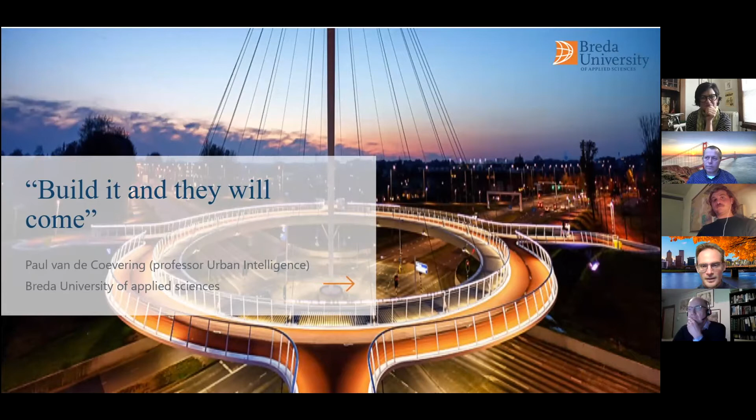Thank you. Okay, so yes, I'm Paul, another Paul, Professor of Urban Intelligence at Breda University. And my expertise is actually on the interaction between land use and transportation, where also cycling and building a multimodal culture is one of my expertise areas. So the interaction between land use, transportation, and attitudes.

So one of the big questions when we try to implement new mobility solutions is if we build new infrastructure, if we build new facilities, will people use it? And the famous term "build it and they will come" is related to that. And it's actually also a question: will they actually come if we build these facilities?

So what we basically try to do in the Netherlands and also in the US, but in a different way, is to create a multimodal city. I've even seen very car dependent and car oriented cities moving towards more multimodal solutions in the last decade. So what we try to do basically is to create compact cities with an emphasis on using public transport and biking and walking, and some balanced car accessibility.

So we all know that the car brought many advantages when it comes to accessibility and freedom, but the downside is also very clear. And as Derek and also Chris already showed during the introduction, in the Netherlands, in the 60s, we also went all the way with facilitating our cities for cars. And then slowly but gradually, we moved backwards, and we re-implemented cycling infrastructure and chose for a more balanced accessibility for the car. And with that, we have been able to dramatically increase also the quality of the public realm.

What I will show today, and I only have 7 minutes, so in approximately 7 minutes, I will try to summarize 7 years of PhD work and a lot of student work that is related to the minor urban retrofitting. That was also where Paul was referring to. We are doing a minor urban retrofitting each year, and we are doing that for host cities in Northern America. And with that, it's a real Kickstarter to get inspiration for new ideas. So for instance, the green loop that is being implemented in Portland. Our students have been developing these ideas also for Northern America and for other cities during the last decades, and this might also be an interesting opportunity for you.

So build it and they will come. Yes, of course, we very often see these examples, and this is one of the busiest cycling facilities in the Netherlands. It's in Utrecht. And what you often see is that we compare the situations between the Netherlands and Northern America, and then look at, okay, so we see much more cycling facilities here, we see many people using it. So if we implement these facilities in Northern America, then will it work? Well, that is of course the question. And one of the challenges that many cities also face in Northern America. But there have been quite successful approaches there, and Portland is also one of the examples.

Why integration with land use is so important is because it's not only the cycling infrastructure that makes people cycle in the Netherlands. First of all, it has always been a big part of compact land use. If you look at the amount of facilities and destinations that people can reach, the Netherlands is one of the top countries in the world. So we have a very compact city, which really facilitates cycling and makes it easier to use the bicycle to a lot of destinations.

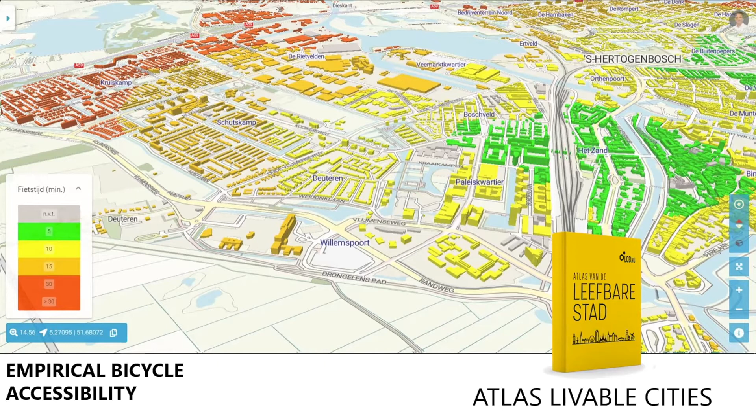And this is the last part of the presentation that Paul was also referring to. That's the urban retrofitting minor, where we have students from the Netherlands, but also from around the world, because we have international education now, where they work on urban retrofitting. So that means creating actually that multimodal city with an attractive public realm and attractive places. And that's not only mobility students, but also urban designers and urban planners that participate in that effort.

So it's really that integral nature that also characterizes the Dutch approach towards mobility that is apparent in this minor. And we also call it silo smashing, because you really try to get rid of the silos between these expertises and really make them work together, which is a challenge in itself.

One of the reasons why we do this, and this is also what I show to students: if you look at the policies in North America, I think they are much better than ours. They really have good papers, good policies, good ideas. But if you look at the implementation, there's still a lot to do. So there are a lot of implementation gaps.

This is just one example where the plans are to develop a great multimodal TOD, and that works in itself on the location. But when you look around it, the network around it is not aligned with it. So that means that in the end, people are not able to really visit the destinations that they want to when they arrive at the TOD.

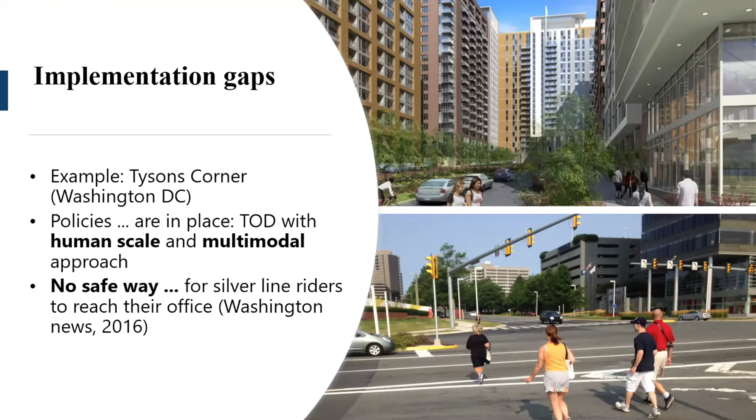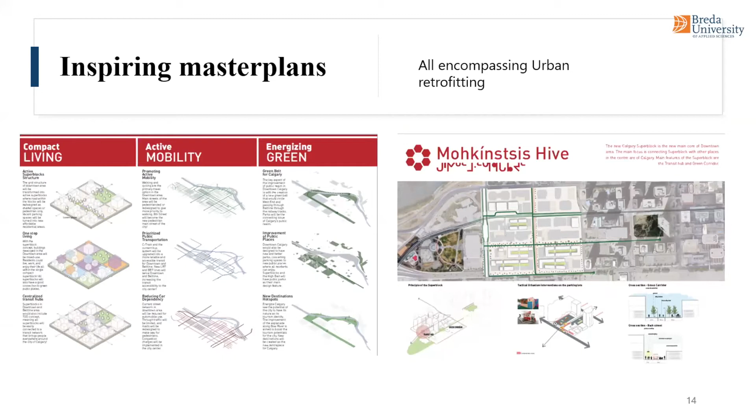This is another plan that is actually in the downtown area of Calgary, where they created the superblock network. So there is a traditional grid system in this downtown area, and they removed some connections, taking the current traffic into account, and built more public space within that downtown area, and more multimodal facilities, such as a mobility hub, etc.

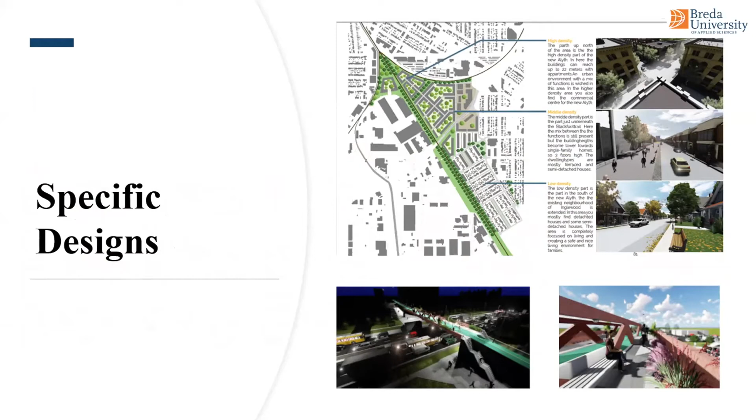Last but not least, they also translate this up to the design level. So really to street level with dimensions for cycling infrastructure, cycling lanes, you name it, to really make it specific, because that's the main challenge that they have.

And in addition, as I just mentioned based on my PhD, just building these facilities is not enough, but you really have to encourage people to start behaving differently and start cycling and building new attitudes. And that's where they use tactical urbanism, branding, behavioral campaigns, etc.

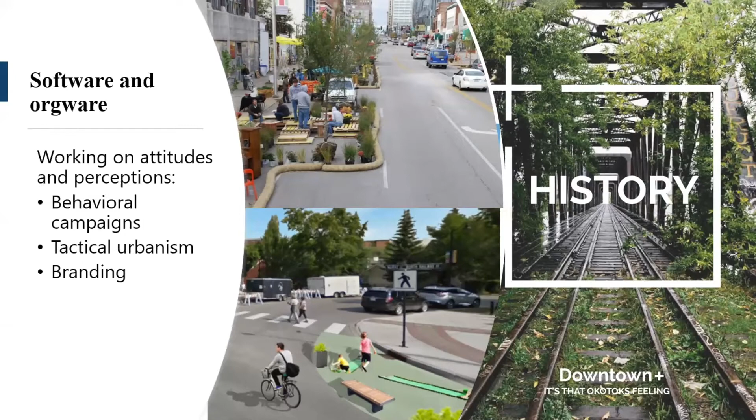And they all try to make approaches to combine all these different measures into one plan for the future of the city that we are working in. So for instance, in 2030, 2040. So that's what I wanted to share with you today.

I think it's a great way to bring agencies together, right? That's what we're seeing in San Francisco, where we have multiple agencies brought together in 2000 under SFMTA, and that gives us opportunities to have the public transit people directly talk to what we now call streets. How do you lay out all those streets? And that's how you can really work across those kinds of divisions.

You can start optimizing. But I know in a lot of situations, it's different agencies with all their own budgets, with all their own goals. So how do you bring those together? And I think what stands out, what Paul just told us, is you invite people in, kind of like it's not a big thing that you're doing.

But it can be a very powerful thing to bring the different dimensions and the disciplines and the different agencies together in a very fun way, and rethink and bring all that experience, all those learnings from Europe. So I think that's a really cool way of doing that. Thank you for that presentation, Paul.

All right, let's go listen to Derek. We'll call him the young wise American. And you're going to tell us a little bit more about what you started to explain in the general session. Yes. Can you hear me all right, Paul? Yeah, we can hear you, and you're not in full screen yet. No. Okay. There we go. So yes, I will provide some brief relief from the attack of the Pauls. That is this workshop.

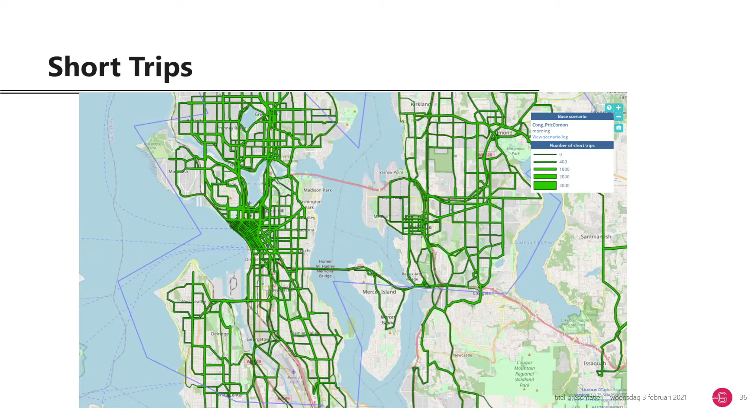How we use this tool in our work is thinking, if people are driving that short of a distance, there's clearly potential and room to switch those short auto trips to non-auto modes. And if you overlay the idea of our mobility hub, which I showed in the general presentation, the largest hub, the international station of the Puget Sound, is King Street Station. You can see there's a lot of short trips concentrated around that station.

If we zoom in even closer to the station, you can see there's a few corridors up here, as well as along here, that have these concentrations of short trips. That can start getting us thinking about how we might want to activate this hub. There's a lot of talk, specifically in the Bay Area, about designing these multimodal hubs that they see in the Netherlands or other European countries.

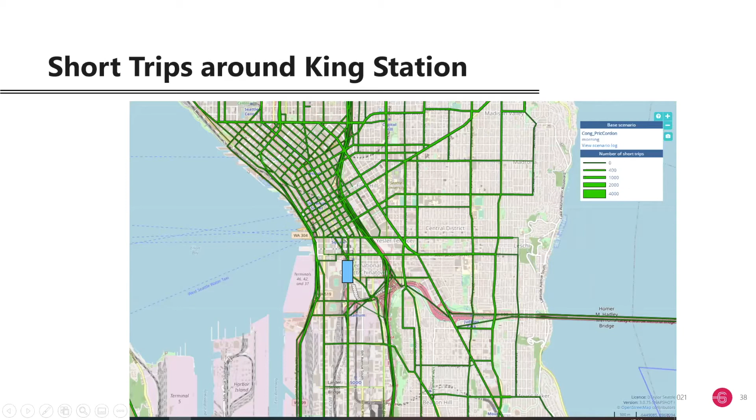But often, if you look at the Salesforce Transit Center in downtown San Francisco, they've put a couple $2 billion into a very beautiful station without much thinking about multimodal access to the station. So looking around King Street Station, I went on Google Images and took screenshots of the surrounding streets. It doesn't necessarily look like a multimodal hub from an accessibility standpoint. The streets are much more favored towards the car, which might be inhibiting the regional transit system from fully operating.

So how can we start thinking about how to activate King Street Station? The first thing is to think about not only a regional hierarchy on the regional network, but also a local hierarchy of streets, designating streets for bikes, public transit, and cars, using innovative designs and policies that incentivize those modes for each type of street. Instead of having all modes on one street, which usually incentivizes cars to take over, you think about a street hierarchy within your system.

So the last thing that I'll close with is just another aspect of what we can quickly do with the MoveMeter, which is running this what if scenario and seeing some of the results of that. So what I've done here is all of these areas shown in black, I've done a little selection on them. And with the MoveMeter, as you can see here, I can actually tell the MoveMeter that because in this hypothetical world, we've created great access to the downtown King Station, that all of these short trips in this region are now going to be cut.

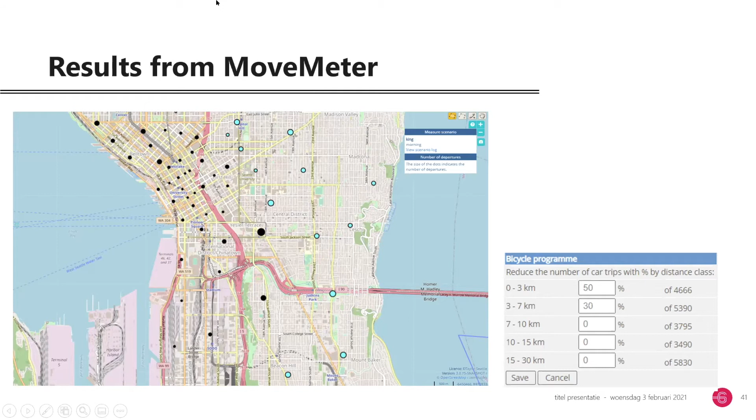And what you can see from just doing those changes on that small area, which is always interesting from a policy standpoint, is how much, of course, you clear up the car network for those who actually need to be driving. Because that's one element of the integrated mobility strategy, is that you are, of course, going to require cars for some trips, and you want to make those trips easier for some people as well. So you can see the benefits to your car network here.

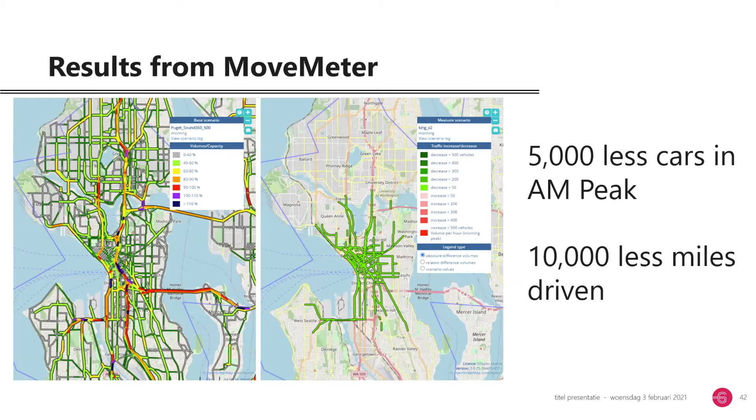And then looking at the overall kind of impact, you have 5,000 less cars in the AM peak and 10,000 less miles driven per day in that AM peak just by making those changes. So that's a bit of the end of that kind of walkthrough. And then as I pass it off to the other Paul here, I think we can start thinking about how to actualize these what if scenarios, and using such things as speed limits and other low cost solutions to redirect cars throughout the city. So I'll pass that back to you, Paul.

Excellent. Thank you, Derek. Yeah, it's great to see the analysis and then the ability to predict. Where can you have an impact and focus in on regions to again bring that multimodal thing back together. Very cool. Thank you, Derek.

Let's go to, I promised, the last Paul. Although I saw another Paul as one of our guests today, but let's go to the last Paul as the speakers. Paul van Koningsbrugge. He is going to talk about how do you tackle this and how do you implement it? How do you use software to actually deliver those improvements to the experience and the safety of the people in the streets, right? And in our public transit vehicles, right?

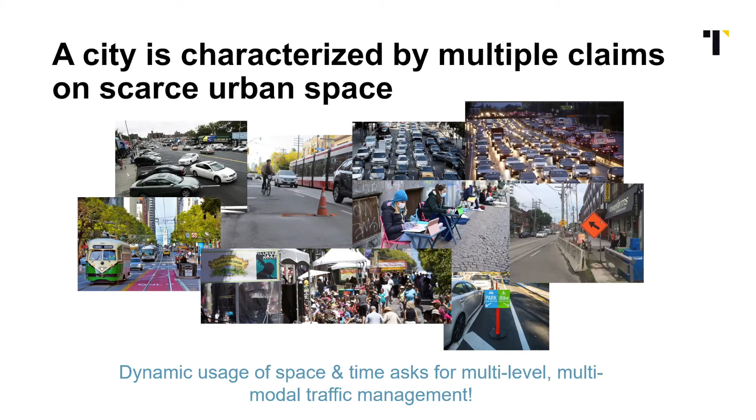And therefore we, for a significant part, have developed, and for the last part, we are developing what we call the funnel. A traffic management funnel that is, on the one hand, just the intersection with intersection control, traffic control, very much on the spot, on top of what happens over there. There is a cyclist, do we need to give him green, yes or no? On the other hand, it's much more thinking about how we should use the city at this very moment. This has an increasing delay in reaction, but it is a more fundamental approach.

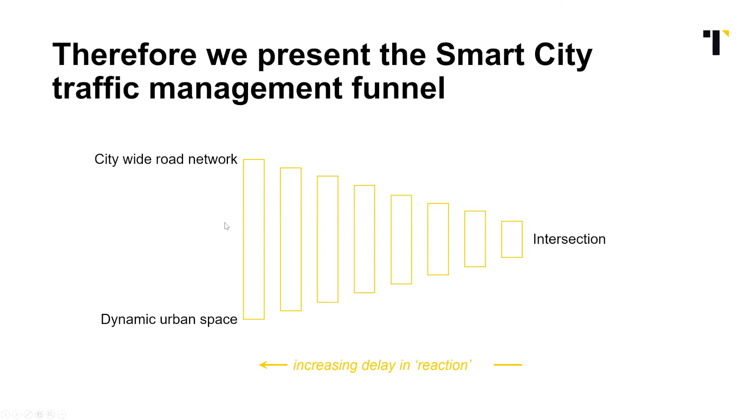And I would like to guide you a little bit along this funnel, starting at the left side, the side which is very local, with a longer reaction time because you have to plan something that takes time, and what we call dynamic urban space. Now, Copenhagen is not a city in the Netherlands, alas, perhaps, but it is a highly interesting city, and there we try to bring some tactical urbanism to the operational level together with city anthropologists, city architects, industrial designers, with a cool team, and started to think, okay, there are parking places.

Can we give the local residents, the entrepreneurs in the city with cafes, bars and restaurants, the possibility to make a reservation for the place? So the moment a car leaves, you can take it and say, okay, not possible to park here anymore. Put some wooden fences so it becomes something humans do with the street. Put in some additional chairs, and this is now a street where your kids can play, or where you can have an extension of your cafe. We did some analog testing over there, and it was a huge success.

Now, how can we make it even more dynamic? And the same for cyclists. There are moments in time, especially in cities like Amsterdam, Copenhagen, Utrecht, when there are lots of cyclists. Can we give them, in a more dynamic way, at that moment of the day more space? Later on, we can take it away and give it back to other residents or to the car drivers. So this is one side we are touching upon.

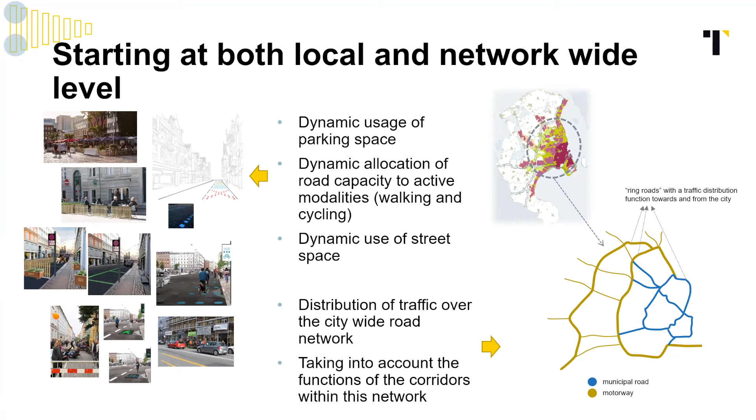One level deeper, in the midst of the funnel, we can say, okay, now we know there are moments in time when there is too much traffic. Perhaps you have to accept that. Can we bring in gates? So there we put the gates, and we try to reduce the number of vehicles, sometimes even cyclists. There are places where there are by far too many cyclists at certain moments of the day. And distribute the traffic a little bit around it so it doesn't harm people, but the density within this sub area is at a level that traffic can flow.

And we can do the same, and we have done the same at this moment. We have it operational in, for instance, the cities of Utrecht and Rotterdam, around a tunnel or around a street where the 1960s structure has been rebuilt into a very nice, beautiful city boulevard with strongly reduced capacity for vehicles. So bring in the gates, distribute traffic around it, play with the influx and the outflux, and keep traffic flowing on a different quality level.

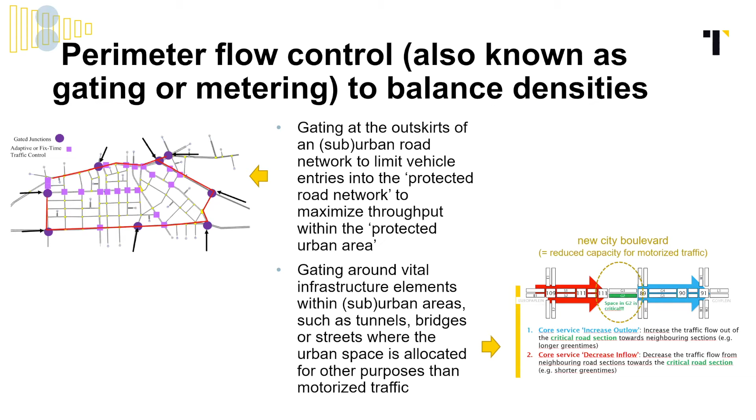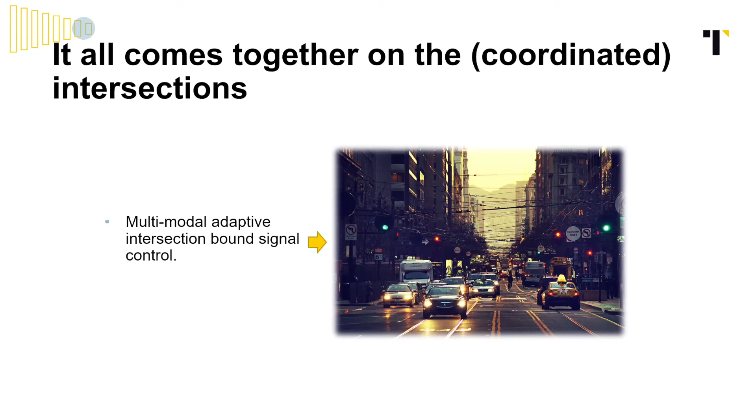And then in the end, you can bring it all back to intersections. You can even coordinate intersections. You can make it highly multimodal, because this is the place where you really have to come to the decision: how much green do I give to the various modalities, to the active transport modes and to cars.

And here, what sincerely helps is some firm political decisions. And they don't need to be crafted in stone. They can change over time, but clearness, I think that's important. That between the level of policy ambitions and the ones who tune the traffic signal controllers, you can just fill that gap. And this is the example of the city of Copenhagen, where they on a political level clearly said,

okay, this is the part where we would like to give priority to the cars, and especially the heavy traffic. And those are the corridors where we would like to give priority to cyclists, buses, pedestrians for crossability. This is how we tuned the traffic signal controllers.

And what we saw in the experiments we did with TomTom in their laboratory with virtual travelers using real-time traffic data, is that car drivers seriously started to follow or were guided along the car-prioritized road network. So you can create space for cyclists, for public transport in this manner. And you can even make it more dynamic. That is a step we are making at this very moment, to make it less hard and more dynamic.

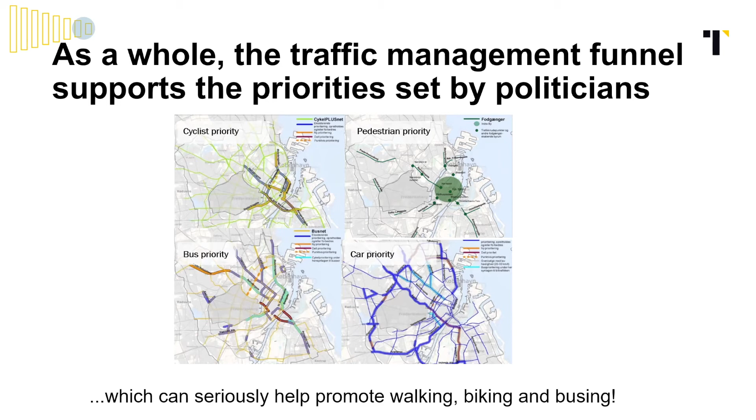I think this is one of our examples in the US, San Francisco. They closed off one street, Market Street, and made it a beautiful street for people to walk, to cycle, to take public transport. And this is how you can play around with your urban planning. This is not that you all should do it like this, but this is a wonderful example.

And in this example, you can say, okay, there are still cars, so should you do it 24/7, or should you say there are moments of the day that we close it off for cars? What will we do with the other cars? So how can we redirect them, and can we bring in the gates to prevent that the densities become too high? It is this kind of playing with traffic on all modalities, because bear in mind, cities like Utrecht, Amsterdam, Copenhagen sometimes seriously have traffic jams of cyclists. Playing around with this brings this dynamics into your thinking.

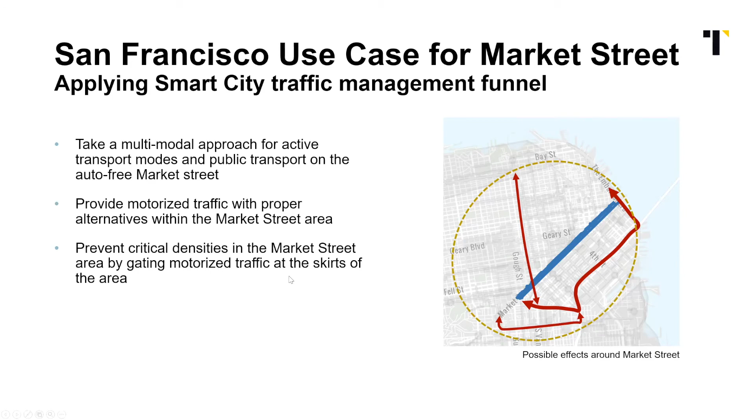Now, the most effective way to do it is, of course, just to do it. We've done something in the Netherlands, and that's wonderful. We've done some in Denmark, but how does it work in a different environment like San Francisco, with a different attitude perhaps towards car driving, given the size of the country, the size of the area, which is completely different than the Netherlands? We have a San Francisco use case, and we are quite lucky to be able to participate over there.

That's 3rd Street. That's a highly interesting street. It has lots of vehicles. It has lots of challenges. It has a light rail vehicle where the quality, the performance doesn't meet the expectations. And of course, there is Vision Zero. So we have to protect pedestrians, have to protect cyclists better than they are protected at this very moment. How can we bring this thinking over there?

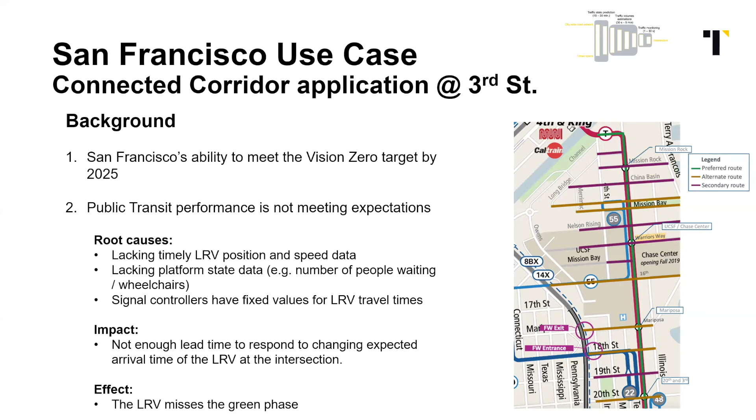And we are running a proof of concept with, well, for us some very interesting colleagues over there. Quanergy brings in LiDAR, so we have a very good understanding of what is moving over an intersection. How do pedestrians cross over intersections? Where are the cars? How do they move? What are the trajectories? We have a good understanding.

We will have a good understanding of the light rail vehicles the moment they start driving, because we know where they are, we know where they're heading for, and we can estimate the time of arrival. And by bringing from the TNL side our own FlowCube, we can even give a good understanding of who is waiting for the LRV, what is the estimated time of onboarding, so what is the estimated time of the LRV leaving the platform, and at what time should we give green for the LRV, so it has a smooth passage over 3rd Street and still is very attractive to the ones who will use it. And we bring it all together with what we call the traffic flow engine.

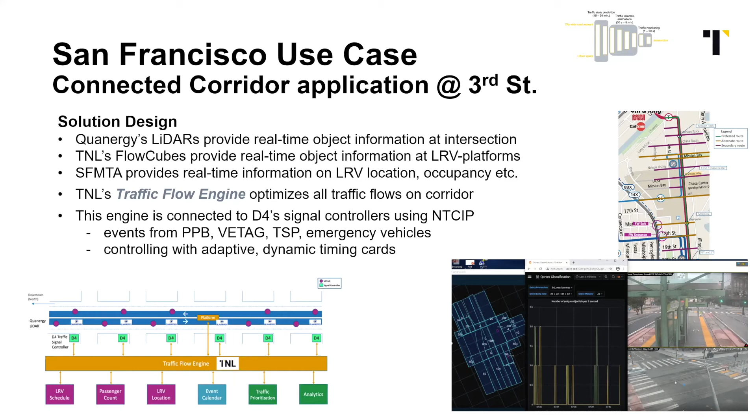There we get all the information, there we do the reasoning, there we start to tune the traffic signal controllers, which are the D4 signal controllers. So all together we form a good consortium, and we bring all the bits and pieces to fill up the complete puzzle and just pick up the challenge. Can we bring this dynamic use to this part of San Francisco over time?